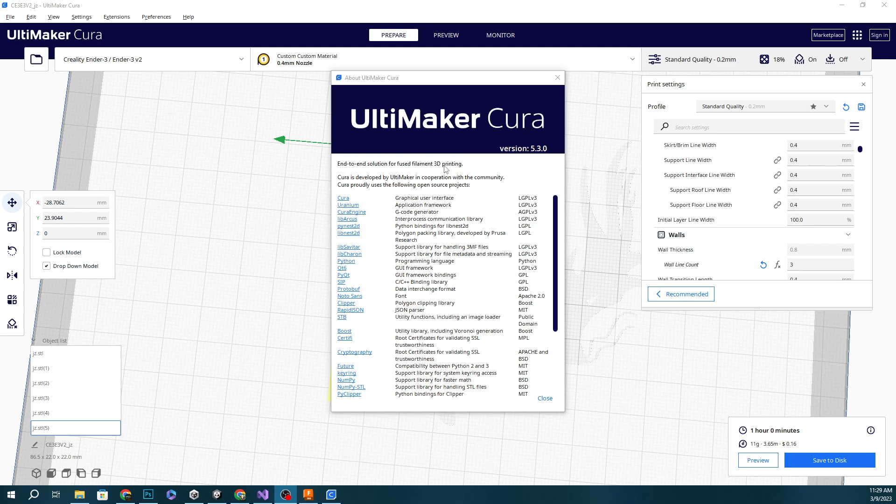Today we're taking a look at the all-new Cura version 5.3. We're going to look at some of the new features and bug fixes. We won't get too far into this today, it's basically just to let you know there's a new version out. And if you have a dual extruder, you're going to love some of the new additions. So let's jump right into it. Got a little model here that's just kind of hanging out, we won't worry about that. But let's go to the What's New section.

They've added a way to combine previously incompatible materials with an interlocking structure. You can see here a bit how this works - basically it cross-hatches them in different layers, making them into one cohesive piece. Previously, if you wanted to make a TPU and PLA part, you'd have trouble getting them joined together and functioning properly, but this takes care of that problem and interlaces materials, making objects stronger and more durable.

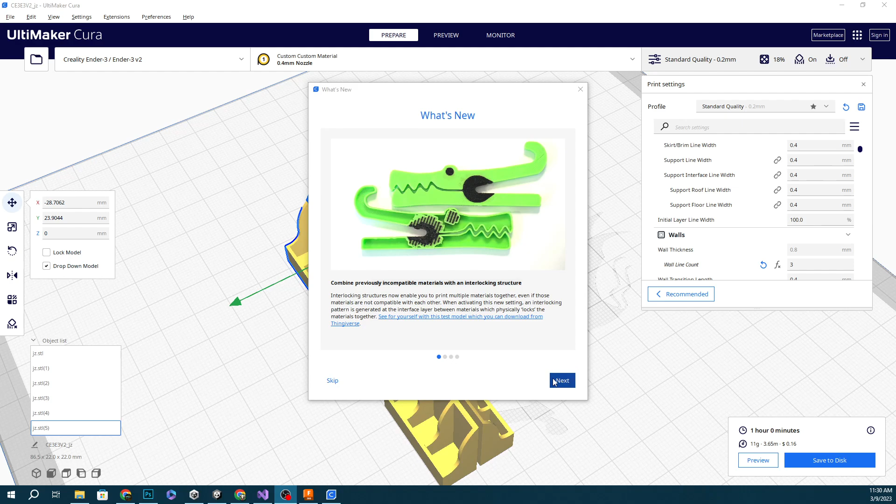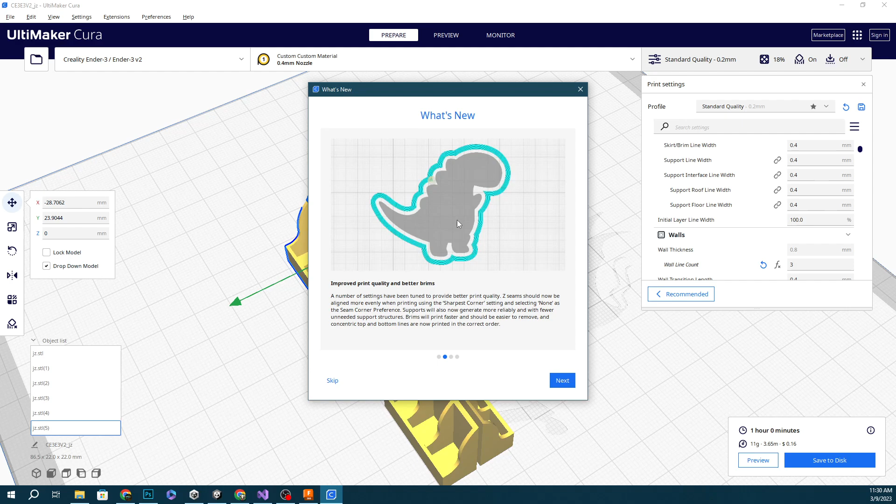The next item in What's New is improved print quality and better brims. They changed a number of settings to provide better print quality and hide the Z-seams more evenly when using sharpest corner. This is a simple addition, but very effective and will improve your prints quite a bit, especially if you have problems aligning the Z-seam, get zits or blobbing, or have issues with your brim. That's a nice little addition - one of those things people don't always ask for, but it's nice to see, because when your Z-seam is aligned to sharpest corner or hidden and it just zits all over the model, it's annoying. Shouldn't be an issue now.

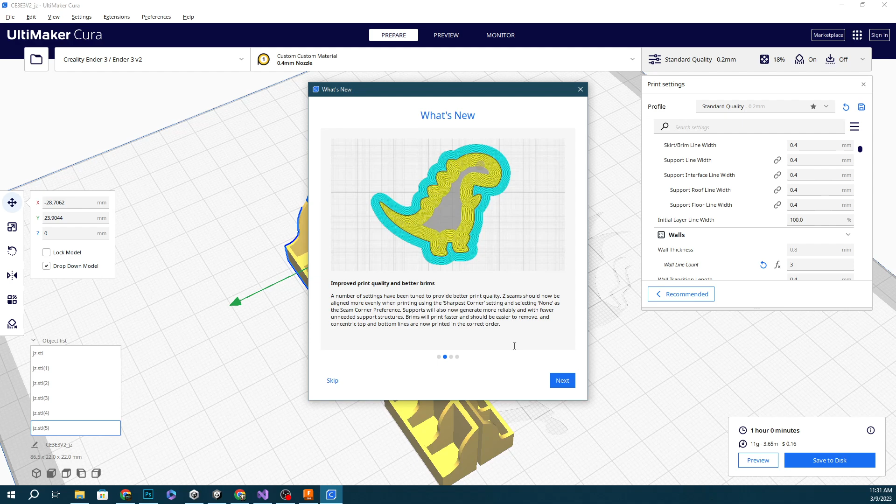Next, they've updated some recommended print settings - we'll take a look at that in a second. Then they added over 75 new third-party printers, so quite a bit of stuff. There are a lot of bug fixes in this version. I don't have time to go over all of it, but suffice to say they did quite a bit to improve Cura's usability and fix a few errors that were going on.

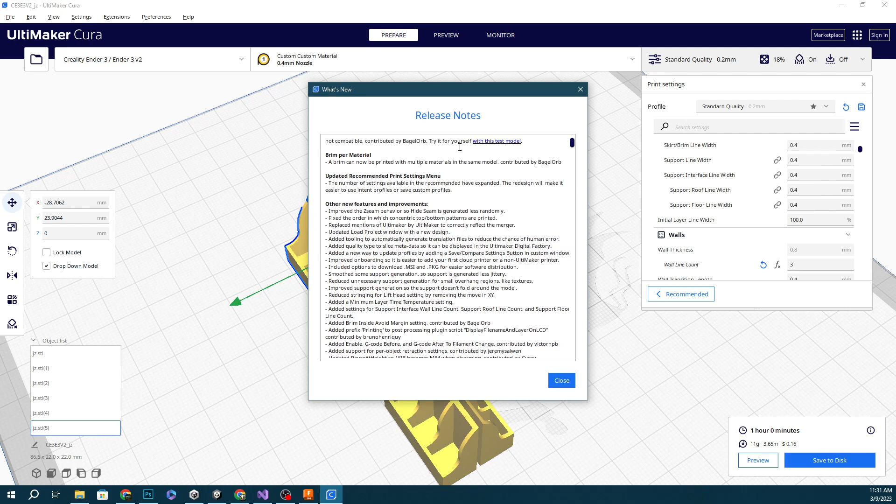So, other new features and improvements: Z-seam behavior, hide seam is less random. That's awesome, you might want to go through here and check out what exactly they changed. But so far, through my testing, this version is totally worth getting. I've had some nice results off of prints I've done in just the last couple days testing the new version, and everything's going really smooth.

Let's take a look real quick at the recommended print settings. There used to be way less here - I'm going to drag this down - but they've added a few. So when you start Cura now as a beginner, these are the settings they're recommending to show you. I can revert back to the defaults, but I'm going to leave mine where they are.

Basically, it lets you pick your strength, your support, and your adhesion. Before, you had infill density, shell thickness, layer height, and temperature, and that was about it. Now you have plenty of other settings - you can choose your infill pattern and thickness of the shell, height and width. That's pretty cool, I like that they got little symbols there to make it easier. This is your walls, this is your top and bottom layers. And for support, you can choose tree support, your placement, and then the adhesion tab, which you can turn on to get a couple other options as well.

That's pretty sweet, I like that they streamlined this. You can actually change the quality as well, and it'll change the settings. Let's go ahead and reload them. There we go - so for super quality, these are the settings I get: infill, thickness, support off, adhesion off, and it gives you your recommended settings.

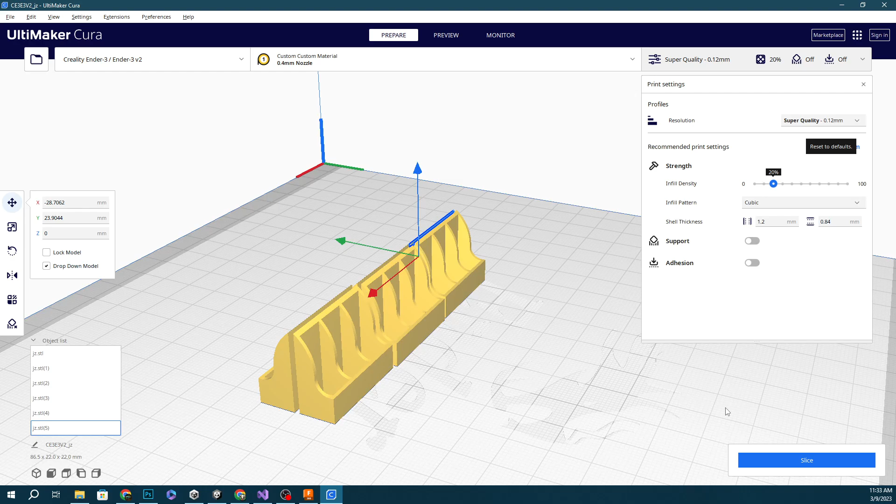So that is basically the gist of this new version, guys. I definitely think it's worth checking out, judging from my print quality. I do have some prints I could show you, but I haven't printed them in both the new and old Cura, so there's really no point showing what improvements have been made, but I am very, very happy with what's coming out of this software.